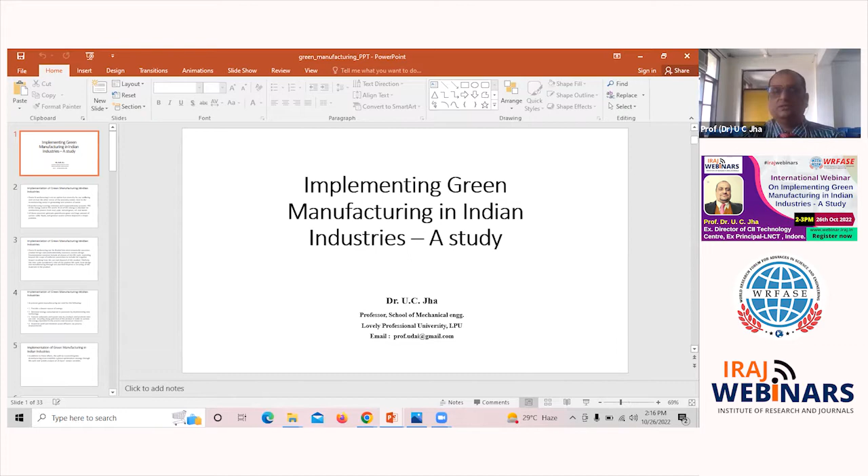As our topic is implementing green manufacturing in Indian industries, we want to implement green manufacturing because it is the need of the hour. As you know, there's a lot of pollution, global warming, and climate change, and you might have seen the effects of climate change. In October there was rain in Delhi and adjacent areas, and if the rain is not in season, that will affect your crops, different seasonal crops. At the end we have less produce, and there is scarcity of food grains and many other difficulties. Likewise, global warming, because of increasing temperature of the world, the Antarctica and the global polar ice is melting fast, and the sea level is increasing, and there is a threat that many coastal areas and countries will submerge in water because of the increasing sea level due to global warming. So green manufacturing is an effort to reduce this global warming and climate change.

As you know, 25% of energy is consumed by manufacturing industry. So it's a huge chunk of energy used by manufacturing industry. So if you implement green manufacturing, that will lead to less pollution, less global warming, and climate change will reduce, so we can have sustainable development.

Sustainable development means we should not consume the whole of the earth's produce ourselves. We should take care of our future generations also, so that earth can have a higher life with living people. Otherwise, if we go at this pace, climate will become so hot. As you might have experienced, those from India, out of 12 months, around 10 months is warm climate, almost hot. Only December and January do we feel some cold. So this is all because of global warming.

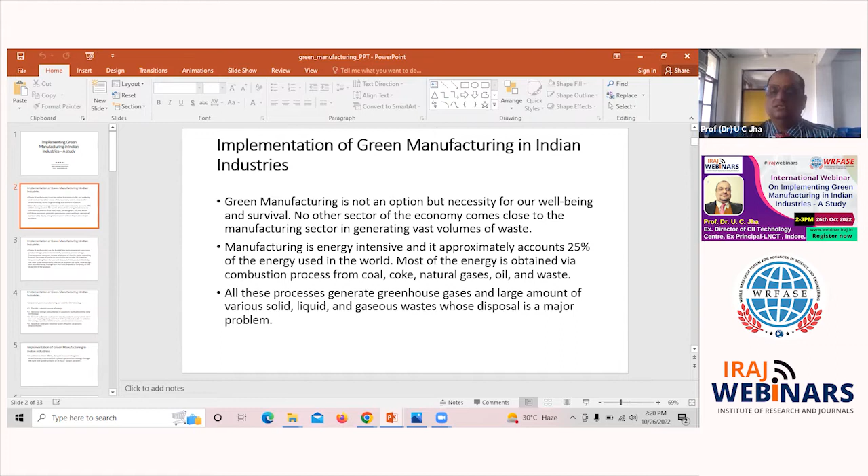We have no other options, because things have become so alarming. As you know, through manufacturing, a lot of greenhouse gases are emitted, and that leads to another kind of pollution: solid, liquid, or gaseous waste, whose disposal is a major problem. If you dispose of those items, that will lead to pollution. So it's better to not produce that kind of manufacturing process - that's called the green manufacturing process - so that there is less pollutant, less waste, and disposal and recycling is not a big issue.

So we'll see one by one how we can implement this. Somebody is interested in how they can implement green manufacturing.

From the design stage itself, from the design and development phase, we should select such material that's nowadays called green material, so that its disposal and recycling becomes easier. The whole manufacturing process starts from design - at the design phase itself, environmental conscious design. You should select such a material that is green material, then take such a design that its disposal becomes easier. Again, it can be used for other kinds of applications. Once its life has been phased out for a particular application, then it can be used for some other purpose.

As you know, somebody has taken out his T-shirt because it's been used for 2 years, 3 years. Then that can be used for cleaning surfaces, cleaning the car, or any other appliances. That way, the effect of disposal will be reduced.

So we'll see some aspects. We'll take some case studies.

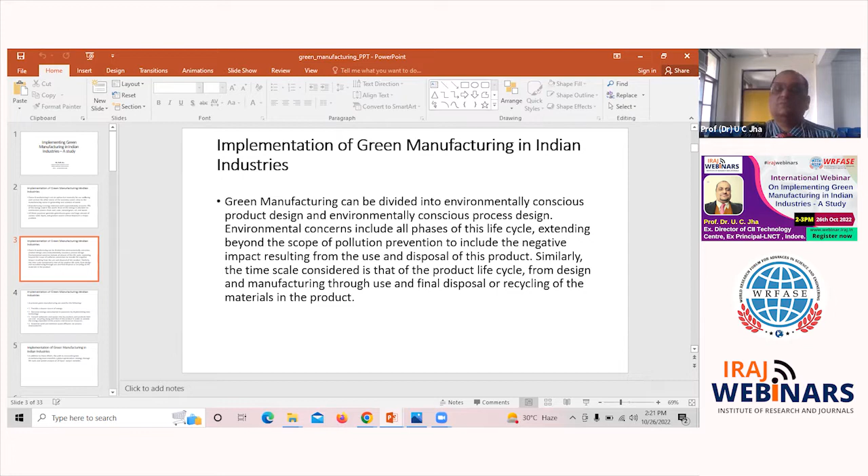At present, green manufacturing is used for the following: to provide a cleaner source of energy. As you know, there's a lot of advancement in the field of renewable energy. A lot of things are going on, and you are using mostly solar energy or hydrogen energy, and even some cars use hydrogen, and there's a lot of research going on so that it becomes viable to use solar energy for automobiles also.

Nowadays electric powered vehicles are much in demand, and in India also many companies have started making electric powered vehicles. Then we have hybrid vehicles. So the purpose is to provide a cleaner source of energy.

As you know, fossil fuel based energy, like a power plant based on coal, diesel, or gas, emits a lot of smoke, and through that smoke, a lot of harmful gases, and disposal of solid, liquid, gaseous waste leads to another kind of problem. So the emphasis is on cleaner energy - solar energy, hydrogen energy, tidal energy. There's a lot of research going on.

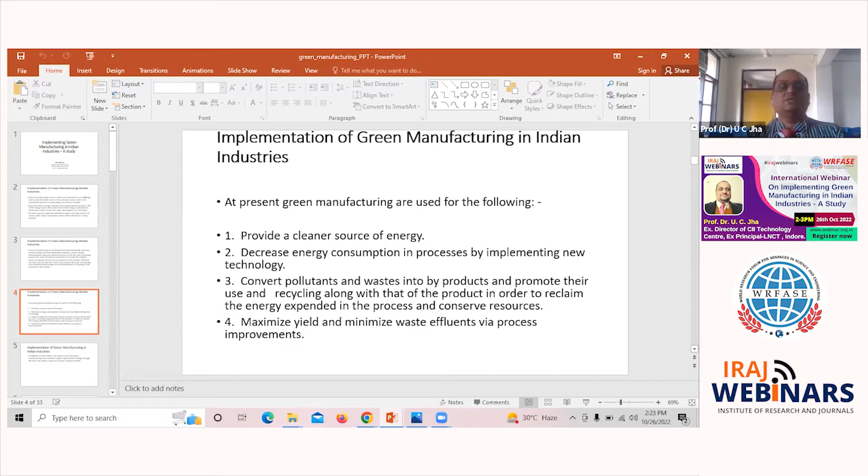Decrease energy consumption, convert pollutants and waste into byproducts - the pollutants and waste can be used as a byproduct for some other factory. Maximize yield and minimize waste - maximize productivity and minimize waste. There should be less waste disposal. You can recycle, reuse, or use it as a byproduct for some other industry. That is the major purpose of green manufacturing.

So, differences in the scope of concern - these are the things which you generally study during green manufacturing, environmental conscious design, or sustainable design: environmental engineering, pollution prevention, environmental conscious design. Actually, environmental conscious design is at the design phase itself, where we are incorporating materials, process, and design, so that it's easier to dispose, easier to recycle, easier to reuse.

Green engineering, life cycle design - don't design for just useful work. Life cycle design follows a cradle to grave approach, from birth to death. We should take care of all those aspects, not only useful life. What was I thinking, that this shoe will work for 2 years and after that we'll throw it out? You should think of reuse, recycle, so that environmental problems will not come out.

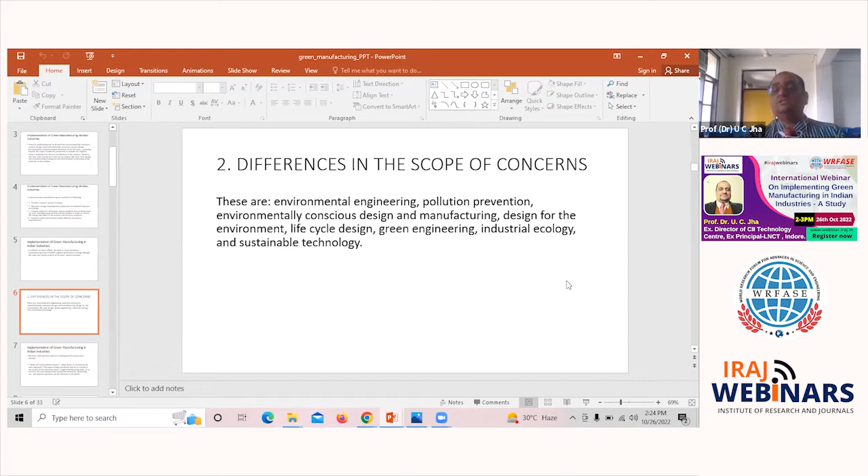So industrial ecology, sustainable development, sustainable technology - these are all parts of green manufacturing. Once you are thinking of green manufacturing, you should take care of these aspects: environmental engineering, environmental conscious design, manufacturing, design from a cradle to grave approach, life cycle design, green engineering, sustainable development. All these are parts of green manufacturing.

So there are two basic concepts: scope of environmental concern and scope of temporal concern. Scope of temporal concern means you are just living in the present, thinking you're not aware of things that will happen in the future because of the waste we have generated and the pollutants that came out of the industry - that is short-sightedness. You should take a broader view and see whether the disposal, the pollutants from smoke or liquid discharge, has any harmful effect on the environment or sustainable development.

As you know, many companies are closing their eyes on all these issues because they think there is a lot of cost involved. So they are just having short-sightedness. They just use and make their product and discharge all the liquid, gaseous, or solid waste into different places, and that becomes a big issue.

Because they think that if you see things in totality, we have to make a lot of expenses in effluent treatment plant. If you want to clean liquid discharge, they have to use ETP, and their running cost will be high. Then for gaseous waste, they have to use scrubbers or other devices which can reduce pollutants in the gases. And likewise for solid waste, you have to make arrangements so that it should be disposed properly. So they think that will incur cost, so better to make your product and dispose those things.

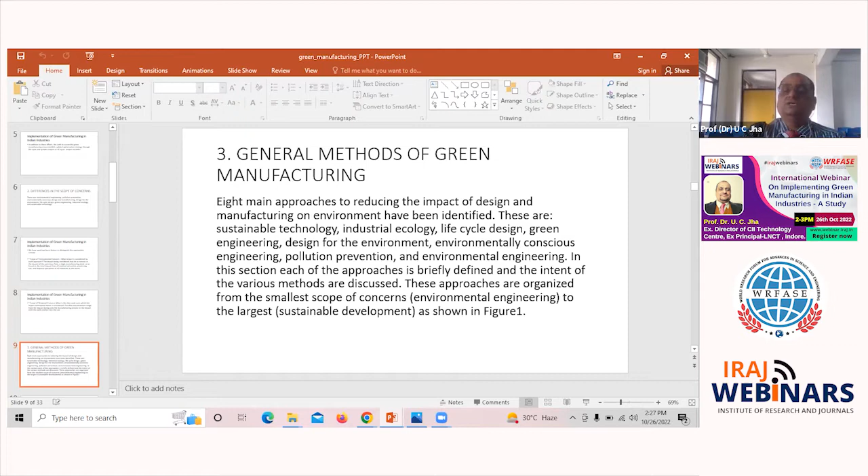So there are 8 main approaches. One by one we'll discuss for implementing green manufacturing: sustainable technology, industrial ecology, life cycle design, green engineering, design for environment, environmental conscious engineering, pollution prevention, and environmental engineering. These are 8 approaches through which we can achieve green manufacturing technology or green manufacturing process in our manufacturing industry.

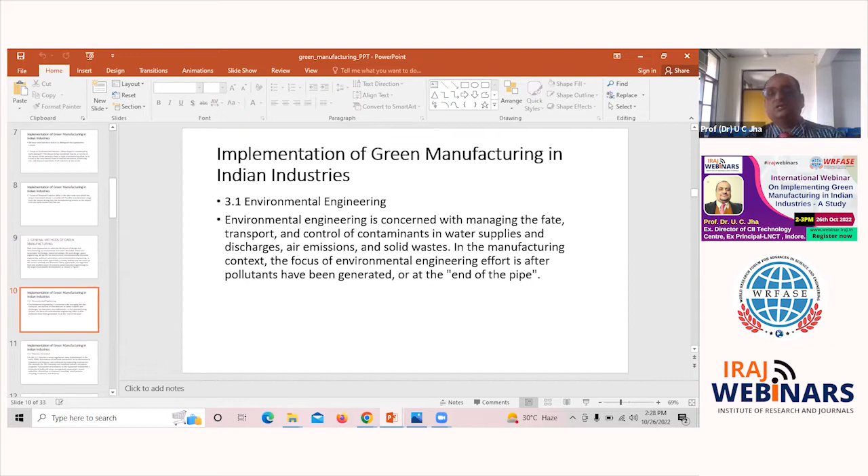One by one, I'll discuss environmental engineering. Everybody should have a basic knowledge of what environmental engineering is. It's the concern of managing, transporting, and controlling contaminants in water supplies and discharges, air emissions, and solid waste. In manufacturing context, the focus of environmental engineering effort is after pollutants have been generated, or at the end of the pipe. Once pollutants have been generated in solid, liquid, or gaseous form, then how you should manage and treat them so they have no harmful effect on the environment.

That means after producing all those wastes, after the manufacturing process, how you should deal with them, how you should dispose, recycle, reuse, and make a byproduct for other industry, so that it has minimum effect on the environment.

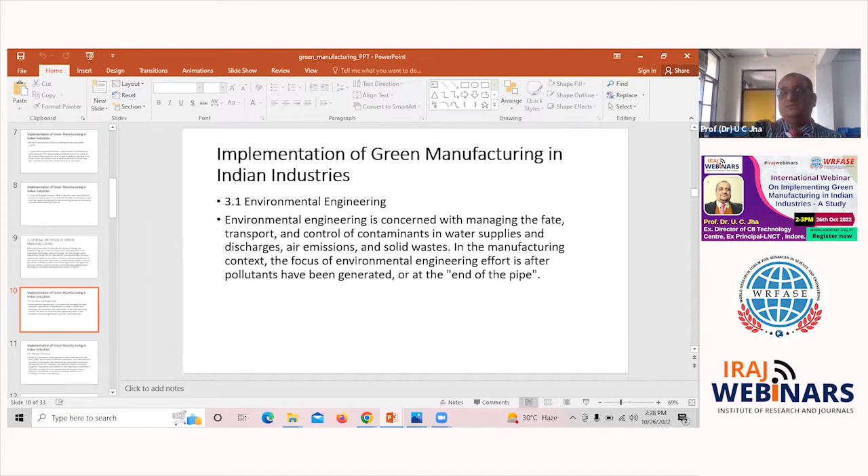Pollution prevention - prevention is better than cure, as all of us know. So tackle it at the source itself: use such material, make such a process, so that there will be less generation of waste in forms of liquid, gas, or solid. Better to prevent creating waste. So we should have efficient technology, efficient machines, efficient people, efficient designers, so that less and less waste should be generated.

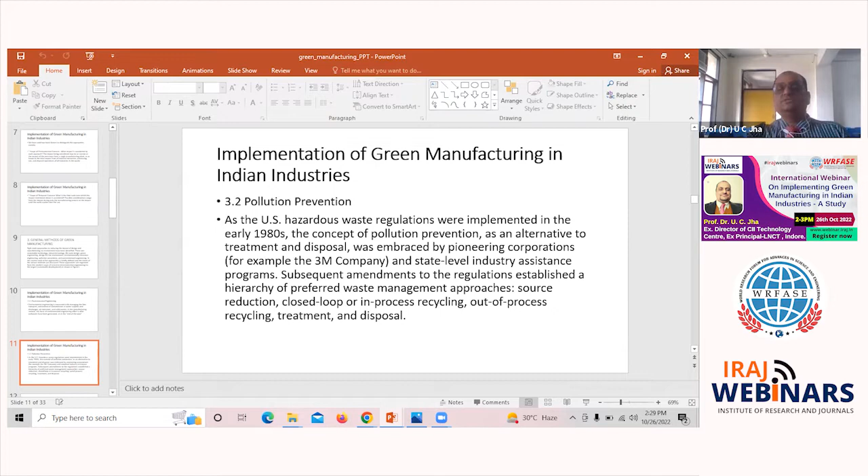Environmental conscious design and manufacturing, we have already discussed. This means at the design phase itself, at the designer stage, we should implement such a design and use such material, so that it becomes easier to dispose, easier to use, and recycle and reuse. So you can extract maximum materials which you have used in the product, and that can be reused. That is environmental conscious design, and that's part of green manufacturing.

If you want to implement green manufacturing, you have to look at all those aspects. Design for the environment: at the design phase itself, you should use such material, such a process, such a configuration, so that it becomes easier to use, reuse, recycle, and dispose.

Life cycle design - I have already discussed this cradle to grave approach: from coming up with the product, then useful life, then disposal or reuse, recycle, all should be in the thinking during a product's design. You should not think that only useful life is our concern, and after that we'll throw it away some way. You should think about cradle to grave. Again, when going for costing, you should think from a life cycle approach - from beginning to end, what are the costs involved, what are positive points, what are negative points, not only for the useful working period.

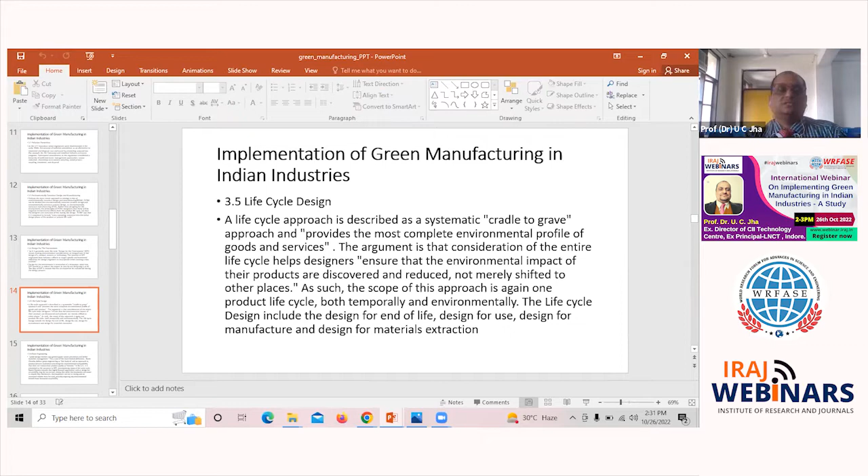As a human has a life cycle, a product also has a life cycle: introduction, as the baby's birth takes place, so the product has also introduction, growth, maturity, decline, and disposal. So this is life cycle design, and life cycle costing also we have to take care of.

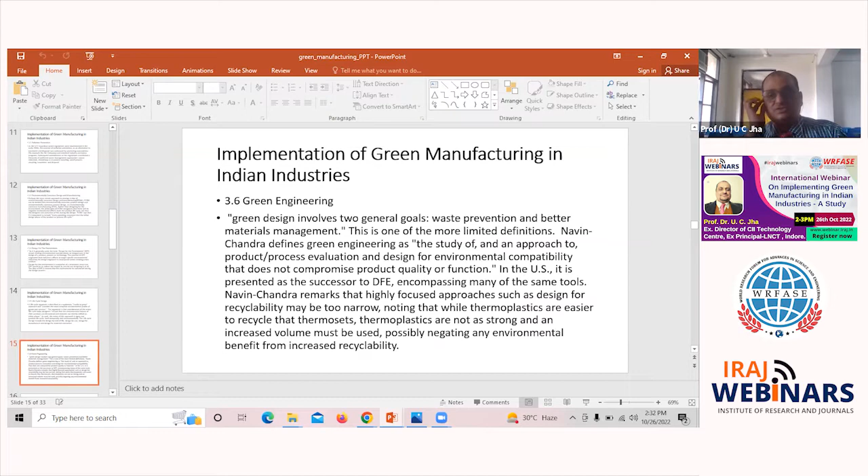Green engineering, we have already discussed. Whatever processes are there, whatever machines are there, there should be minimum waste disposal, minimum waste creation. So that is green engineering.

Industrial ecology is a broader aspect of environment. When we see the human, the other creatures, biodiversity, plant species - all should coexist, and one should not harm others. So that is industrial ecology.

In many places there is an industrial ecology park, in which that industry is also there, and whatever comes out of that industry is used as raw material for other industry. A lot of greenery is there, so carbon dioxide in the environment is absorbed by those greeneries, and oxygen is produced. So that way, all things can coexist, and there will be minimum waste generation, as the waste of one company industry becomes the raw material for another company.

As in the sugarcane industry, the molasses which comes out of the sugar mill are used as a raw material for the liquor industry. So that way there is minimization of waste generation. That is industrial ecology - all species, human, industry, creatures, plants should coexist, and there should be minimum waste generation.

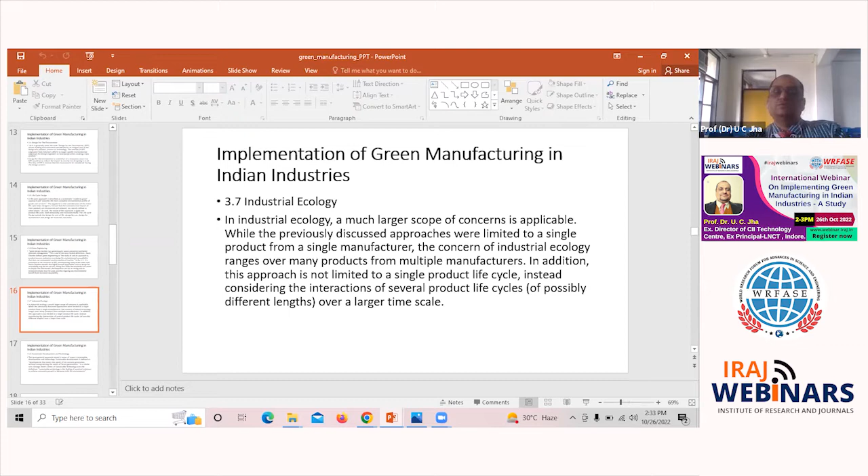Sustainable development and technology. Sustainable development is development that meets the needs of the present generation without compromising the needs of future generations. So sustainable development means you should not consume all the resources yourself in your generation, but you should keep resources so that coming generations will also use that, and they can survive, prosper, and again achieve their height as they expect. So that is sustainable development.

Again, for sustainable development, we should reduce our consumption. We should consume only what is needed, not for fashion or for showing off. So that is sustainable development.

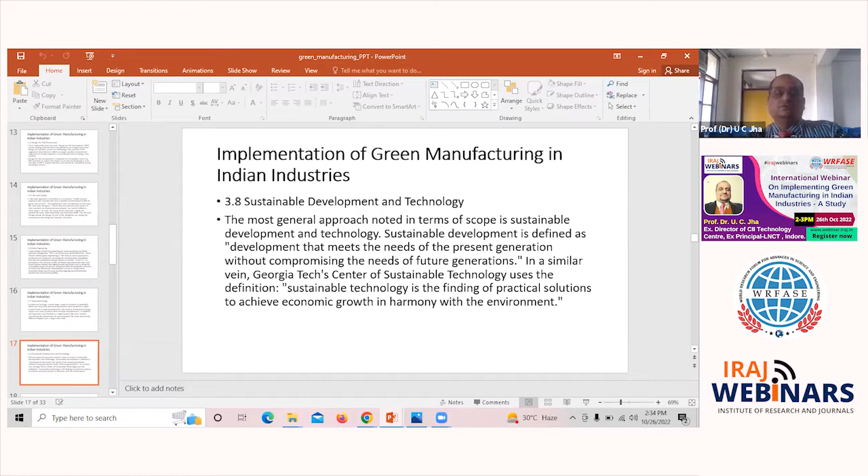As I have discussed, life cycle cost models - life cycle costing is not only about useful life cost, but we should take care of life cycle cost from introduction to phase out, cradle to grave. What are the costs involved? If you take care of all this costing, you will find that green manufacturing helps you in reducing the company's cost, enhancing the brand image, and enhancing the reputation.

The classical example is CFL bulbs - compact fluorescent lighting bulbs. As you know, its cost is much higher. The initial cost of the bulb is approximately 10 times that of the normal incandescent bulb. So CFL bulb is costly, 10 times more costly.

But if you see its life cycle cost, it consumes very less energy compared to traditional bulbs. So over time, whatever investment you have made in CFL bulbs, you get a multiplied return on that. So if you see the life cycle cost, many hidden things become apparent, and at the end you will find that green manufacturing has helped you a lot in achieving the organizational goal as well as sustainable development, which are the need of the hour.

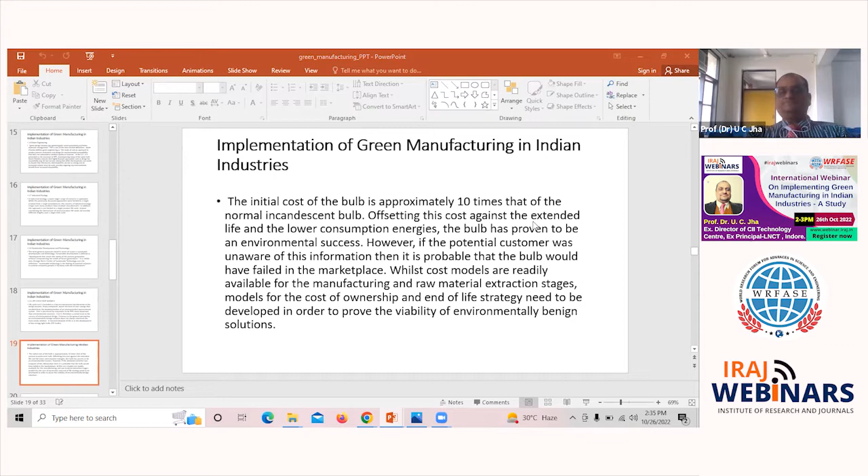So implementing green manufacturing in the industries - life cycle costing, which I have already discussed.

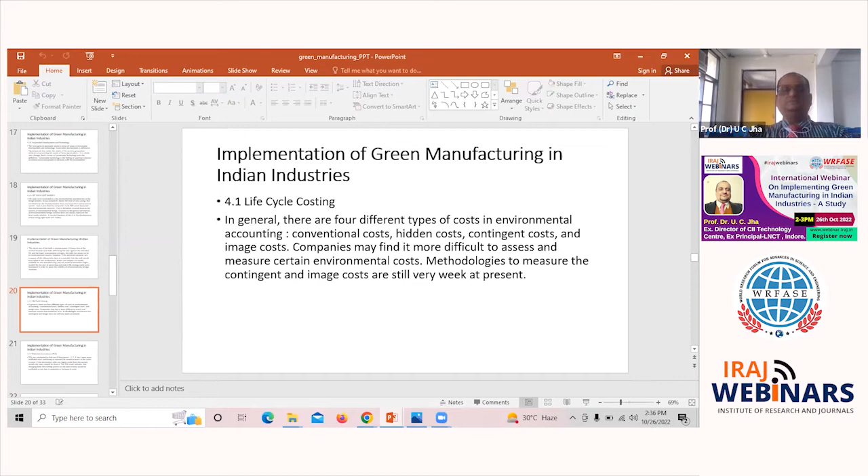Total cost assessment was conducted to find out if alternatives were more preferred than continuing to operate the current process. If you have certain alternatives, costing should be done from process 1, process 2, process 3, and we have to see which is most beneficial. We should implement with that process, that material, that design. That is total cost assessment - if you have multiple options, you should take care of all the costing and implement whichever is most beneficial.

Performance measurement: if you can't measure, you can't control. At every aspect, whether it's costing, benefits, sustainability, or productivity, you should be able to measure before and after implementation of green manufacturing - what improvement has been made, what are the costing, productivity, efficiency, and waste generation before and after implementing green manufacturing. All that should be measured. Only then can you improve.

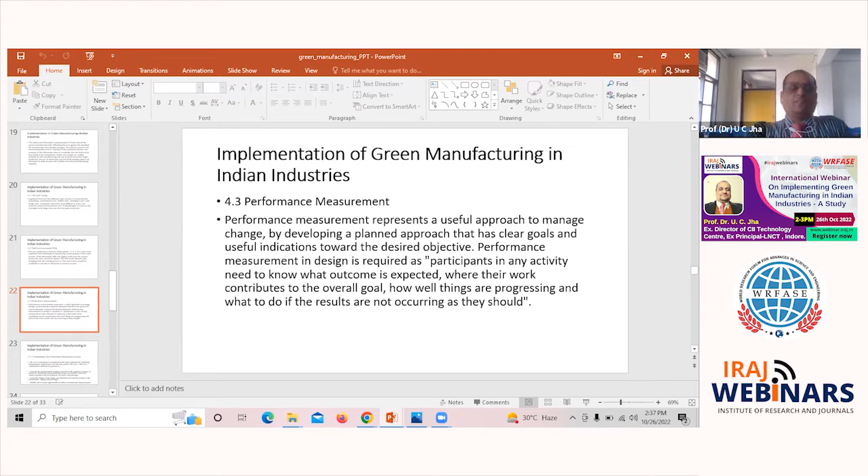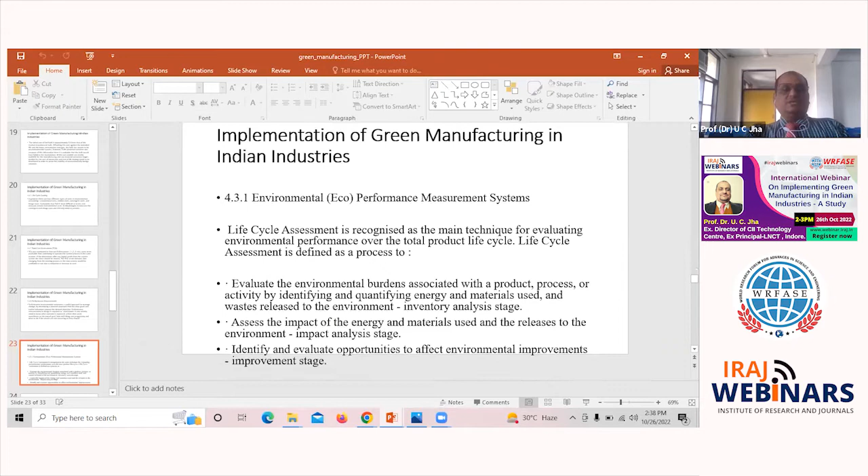So implementation of green manufacturing takes these aspects. As we have already discussed, environmental performance measurement, then life cycle assessment, evaluating performance at every aspect. So these are the issues in implementing. Then we should have green productivity indicators. Green productivity index is called GP index, in which we'll know how much implementation has been done and how much is remaining. So GP index.

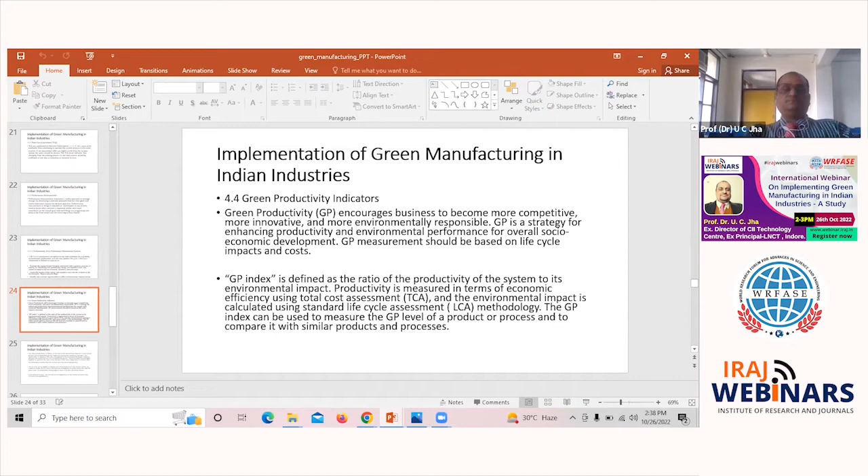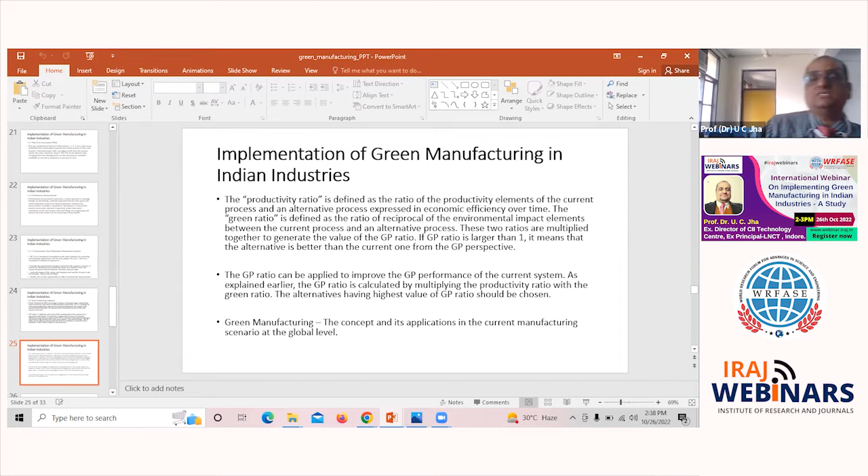Productivity ratio. So productivity ratio, you have to compare what the productivity was before implementing green manufacturing, and what it is after. So at each step you should know how to measure performance, and we should track the measurement, and then see if you are continuously improving in that direction or not. And if not, then you have to take measures so that you can be on track. So these are the steps required to implement green manufacturing. I'll show one small video of implementation of green manufacturing.

Just a minute. That is done in Frito-Lay's, Lay's chips all of us use. So I'll just show it.

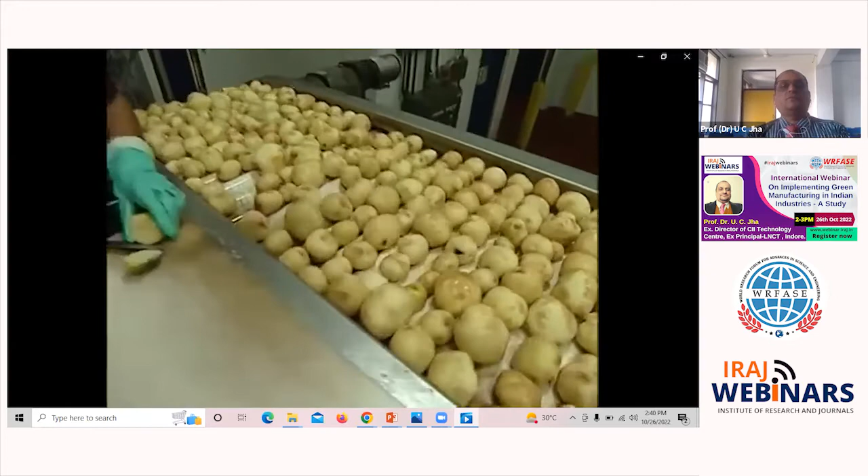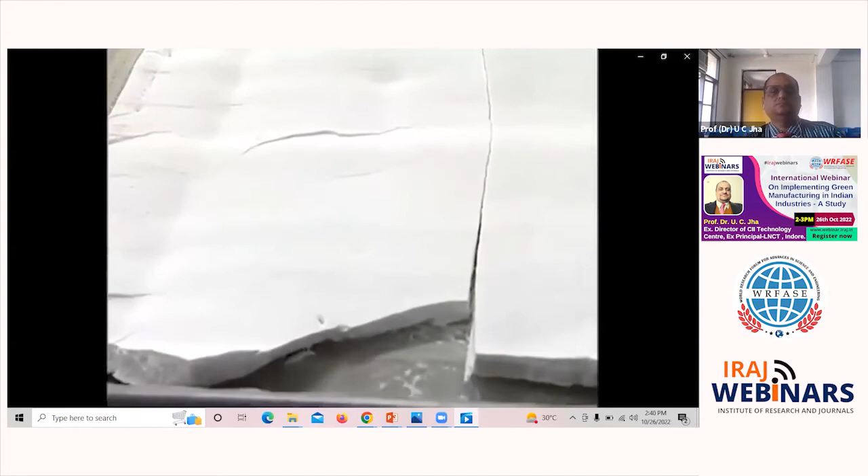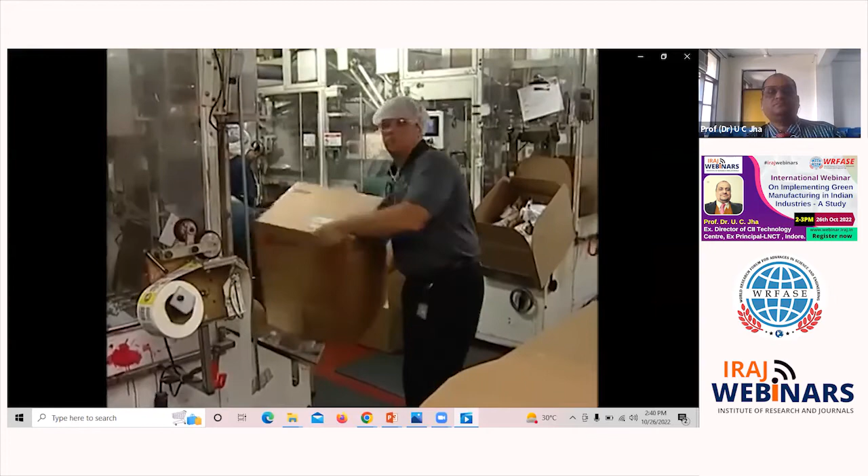Major manufacturers in America and around the globe are now focusing on environmental responsibility and going green in their daily production processes. Frito-Lay, the well-known multi-billion-dollar snack food maker, is one such company. Driven by top-level commitment to being green, the company is aggressively moving to significantly reduce its consumption of key resources system-wide. Reclaiming and recycling are obvious areas of attention in the company's efforts. For example, at the start of the manufacture of potato chips, the washing process produces starch as a natural and unavoidable byproduct. 2.2 million pounds of starch are reclaimed annually from this plant alone. The starch is treated and sold for other uses. At the end of the production line, cardboard boxes used for packing and delivering chips to stores are also recycled, some of them many times over, as demonstrated by the many labels seen on the side of boxes in the packing area. Each year, 5 million trees are saved, enough to fill New York's Central Park nearly 200 times.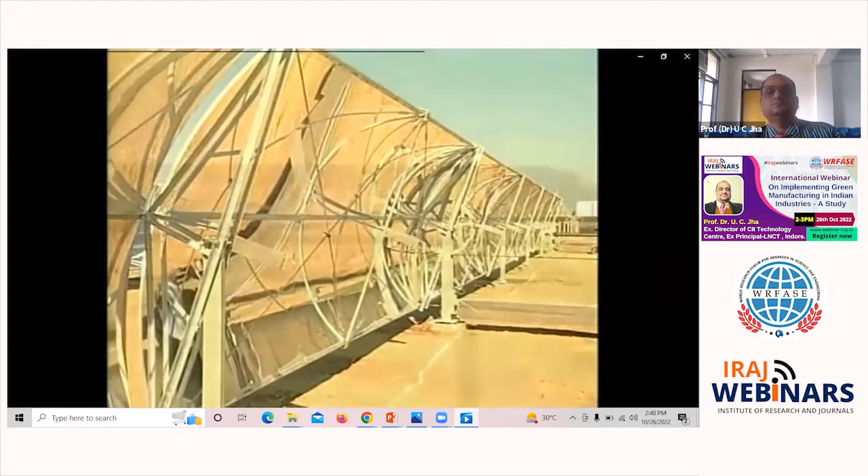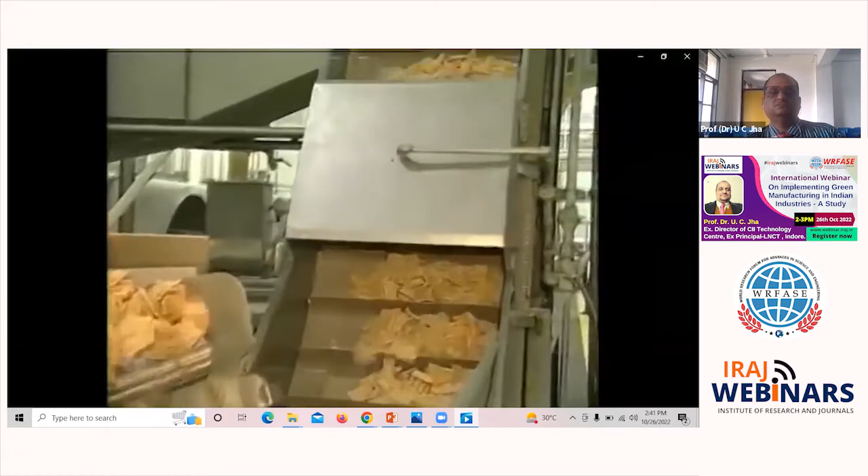Solar energy also is a part of Frito-Lay's initiatives. At its Modesto, California plant, 50 acres of solar concentrators generate power for its SunChips manufacturing facility. Green manufacturing has really been a focus for Frito-Lay since the 90s. We really started out focusing on resource conservation as a cost initiative to drive down our overall operational costs in energy and utilities. But it's now really become a focus on getting to zero. How do we have a zero impact on the environment from what we use from a natural resource standpoint? So how might we recycle and reuse 90% of all of our water? That's the real focus today. So it's moved from a focus on driving operational cost performance to doing the right thing for the environment, and also demonstrating that we can do it well before we have to.

Stating a commitment to green manufacturing and sustainable production is one thing. Action is quite another. For a number of years now, the company has put in place resource conservation teams to help support its sustainability goals. The purpose of the resource conservation teams at Frito-Lay is to look, listen, and monitor the usages for energy and utilities. Back in the mid to late 90s, our company was looking at what was going to be available, especially in water in the United States, natural gas, and looking out 10 to 15 years at what was going to happen in the United States. Some of those things that we took for granted in the late 80s and the early 90s are becoming more scarce and less available. Because of that, in the mid to late 90s, we came up with resource conservation teams whose role is to go out and look, listen, find out where we're using them, how much we're using, to monitor that usage, and to bring the usage down to a reasonable control level.

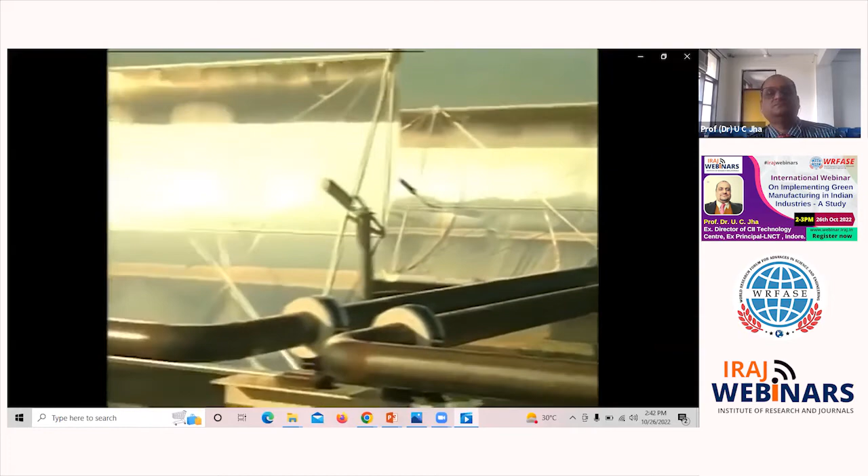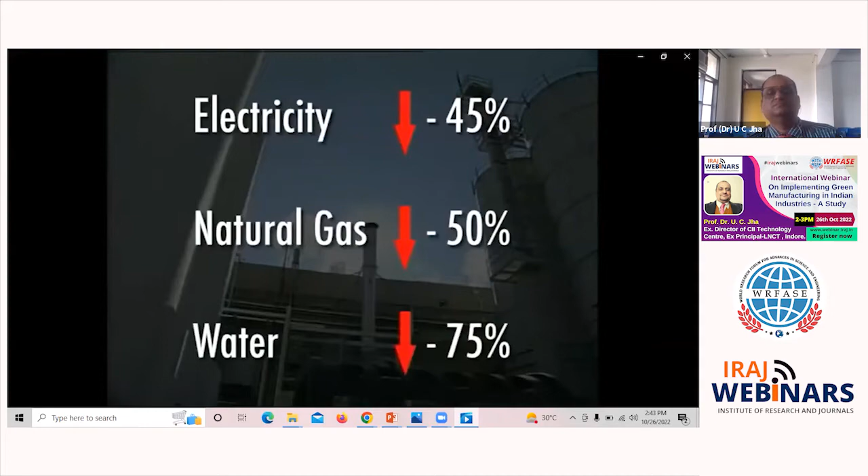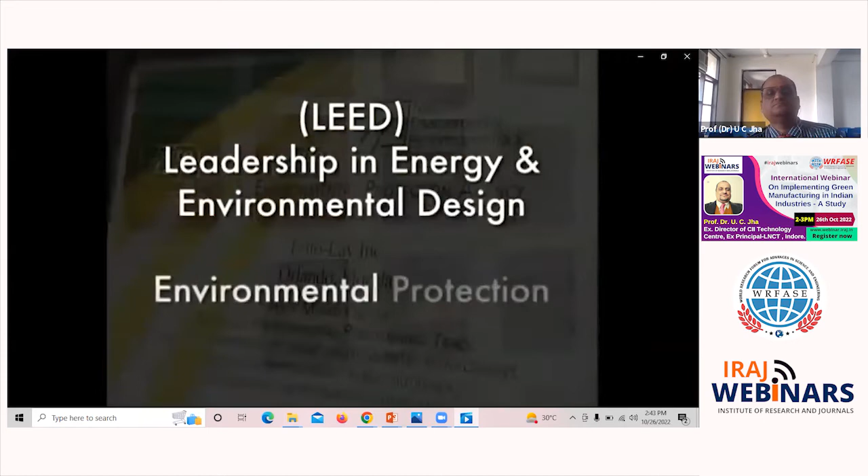Company goals include reducing electricity use by 45%, natural gas use by 50%, and water 75% per pound of product by 2017 compared to original company baseline levels. The company's sustainability initiatives have not gone unnoticed. Awards and recognition have come from high-profile entities and agencies such as LEED, Leadership in Energy and Environmental Design, and the Environmental Protection Agency. Most recently, PepsiCo, Frito-Lay's parent company, earned the prestigious Partner of the Year award from the EPA. Zero landfill waste, defined as less than 1% of total facility waste going to landfill, also is a goal for Frito-Lay.

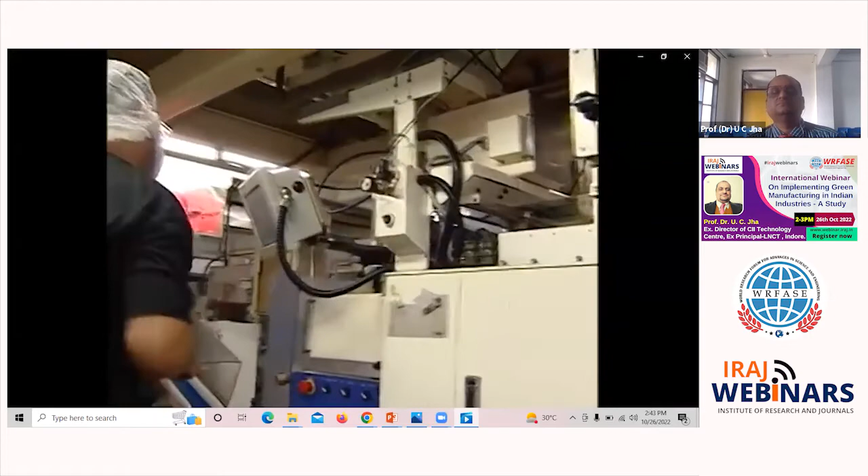People will go out to it. So how can we do that to minimize our environmental footprint? A large part of it is going out and looking for additional recycling streams for things that never were recyclable in the past. Let's go out and find out who can reuse them. And what we're finding out is that there are a lot of materials that we can reuse that we never thought was possible to reuse.

So based on that, we have certain types of plastic that in a home are not recyclable, but for an industry, because of the amounts we produce, we're capable of sending them off to a recycling facility and reused. The goals set by the company are aggressive, but employees are dedicated to making a difference.

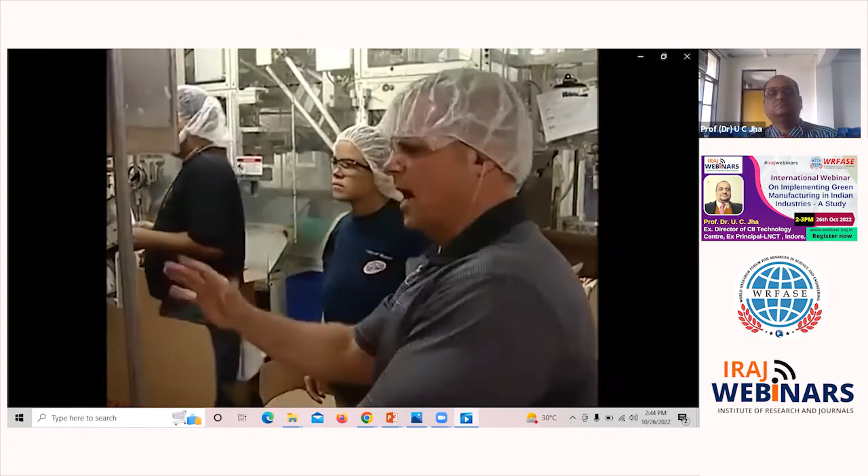Our baseline year, we were at 15%. Last year, the manufacturing plant covered 7% landfill percentage. And next year, we're planning on being pretty close to that 1% goal. Currently, we're trending at about 6.5% to 6%, and it's moving down as we find more and more areas where we can recycle different waste streams.

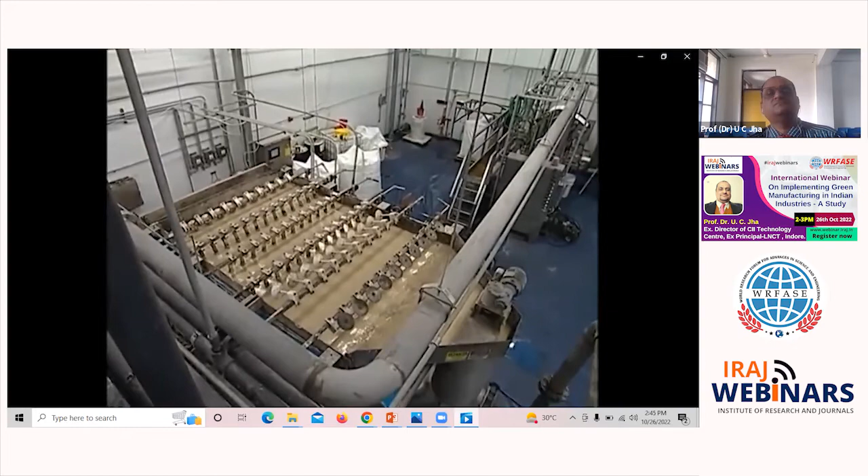One of the most important topics in the world of business today is sustainability, controlling the use of scarce resources to make our planet a better place to work and live. Managers are finding that the combination of expensive resources, sundry regulations, and firms' reputation results in a heavy burden that falls squarely on the shoulders of operations managers.

A whole new area of operations management jobs is being created in a drive for green manufacturing and sustainability. And Frito-Lay, as we've seen, is a national leader in this endeavor.

So am I audible now? Yes, sir. You're audible, sir.

So, it was a case example, and I'll take some Indian companies who have implemented it. So this is Rama Phosphate Limited, Indore, and you can see implementation of green manufacturing in Rama Phosphate Limited, Indore. By applying the concept of green manufacturing, it has not gained only financially, but also increased the overall productivity by 20%. And you can see many benefits they have got.

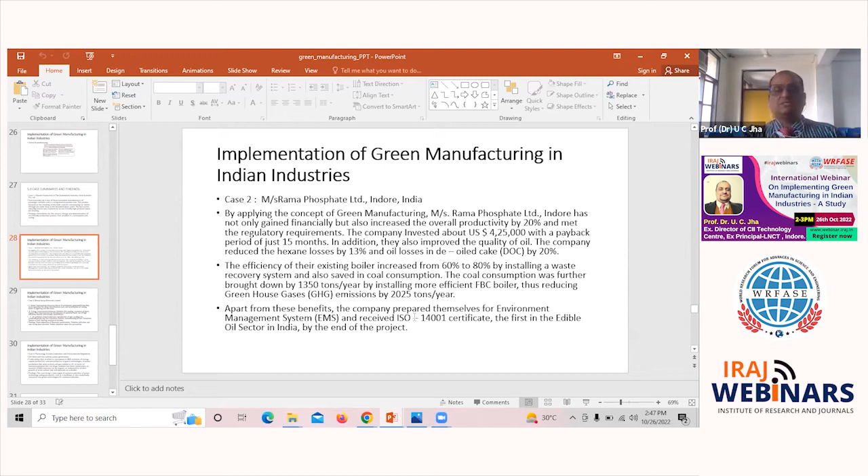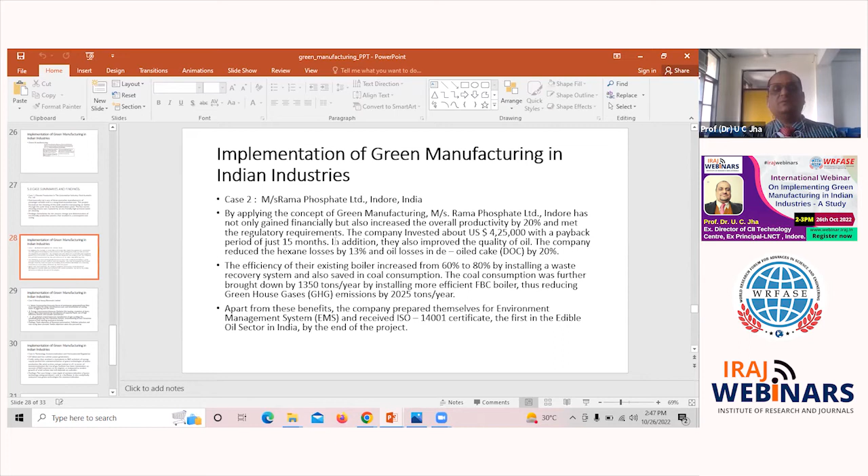So after all, the fear of the company is that if they invest in this technology, green manufacturing, there will be a lot of cost incurred and they may not get the benefit. But that is the myth. You can see in 15 months itself, they have got to break even, and then they started making profit and their productivity increased.

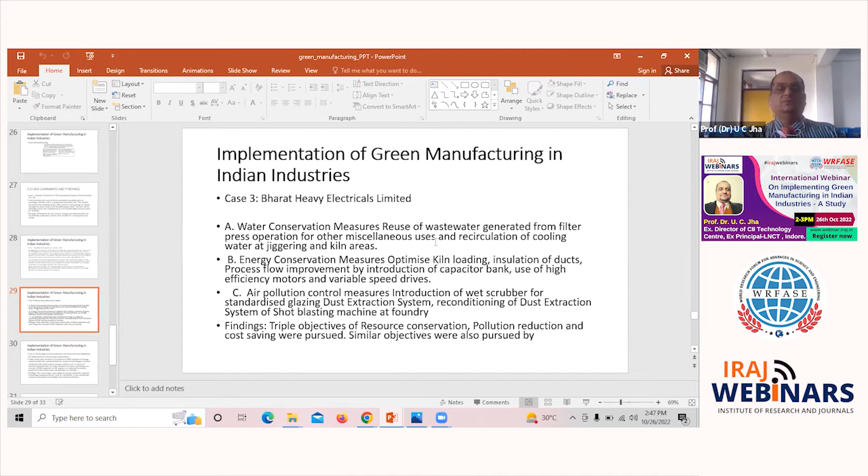So likewise, another company, BHEL, Bharat Heavy Electricals Limited, uses this green manufacturing technology. Water conservation measures, reuse of wastewater generated from press operations. So they have reused the wastewater by treating the water. Energy conservation measures, they have taken. Also, they have got a lot of benefit.

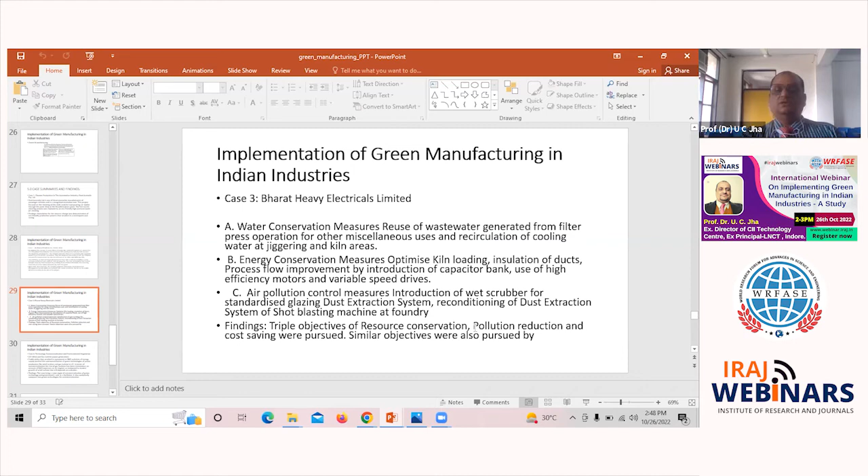Air pollution control measures. So the triple objective of resource conservation, pollution reduction, and cost saving were pursued. Similar objectives are also pursued by many other companies. So that way we can see that Indian companies are making steps ahead towards green manufacturing, and they are getting substantial benefits.

I hope that this seminar will help those who want to implement green manufacturing, and that is the need of the hour. Most companies who can afford it can go for this. As you know, initial investment may be there, but the return is very fast, and after all, the brand image, the social image, and benefit you will get will be much higher than the investment you make.

So in conclusion, I strongly believe that green manufacturing can become both economically and socially attractive, and its positive environmental impact is only a beneficial side effect. So we will have a positive environmental impact. It will reduce global warming, then reduce climate change, which is the need of the hour.